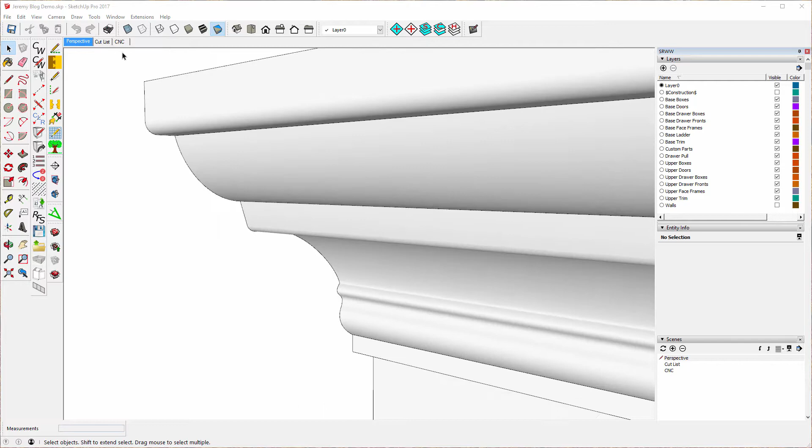Notice this trim, nice and smooth. And I got this off the internet and traced it using Bezier curve tools and the follow me tool to create it. It's actually in 3 parts. This is 1 part, 2 parts, and this is actually the same part as this but flipped. We'll get to that later.

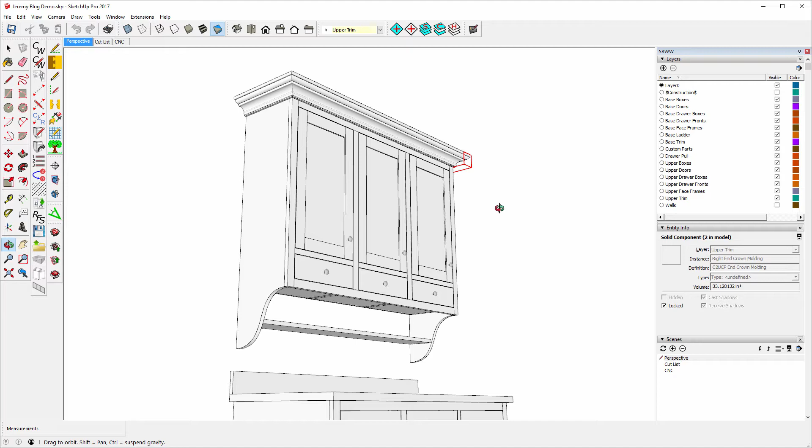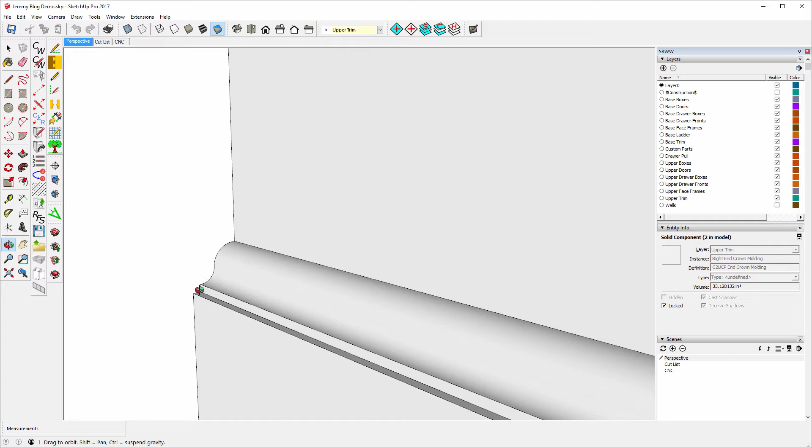This was simply a matter of drawing this cabinet using sheets here instead of end panels, and then extending them and creating this curve and cutting it out. I also added this little shelf. Nothing fancy about the countertop or the backsplash. This profile was created by simply creating a 3/8 inch round here, 1/4 inch round here, and then a 1/8 inch by 1/8 inch rabbet here.

So let me view basically the CabWriter components. I'm going to take the doors, I'm going to take the upper doors and upper drawer fronts off. And you're left with the drawer boxes. You'll see later on we had to compensate for this small drawer front. I believe it's 4.5 inches.

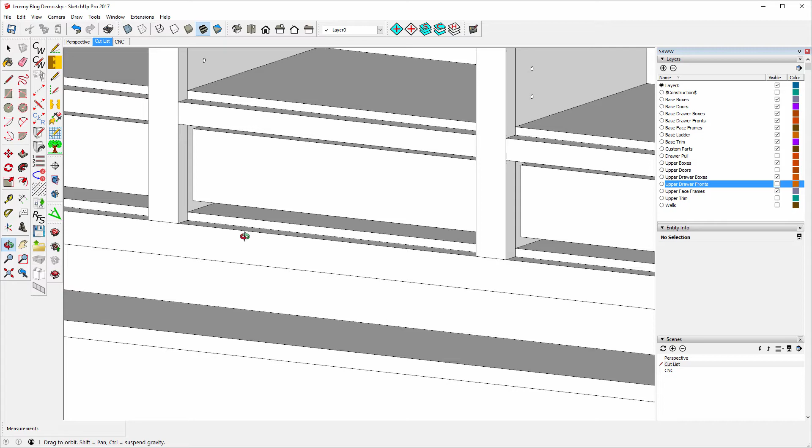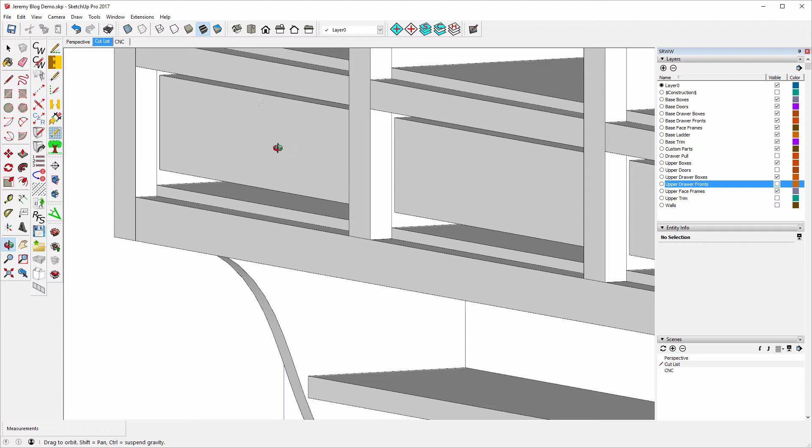Yes. And notice also that because the bottom of the cabinet is inset, I'll show you that. The bottom of the cabinet is actually inset. Come around back here. The bottom of the cabinet's inset 1 1/8 inch. And what that does is it causes the bottom to be raised above the bottom rail by 3/8 of an inch. That cuts down on the opening here. So we have to take that into account, and we have to choose a drawer box that's going to leave us 9/16 of an inch gap on the bottom here, or clearance, and 1/4 of an inch clearance on the top. So we'll get to that later on, how we did that.

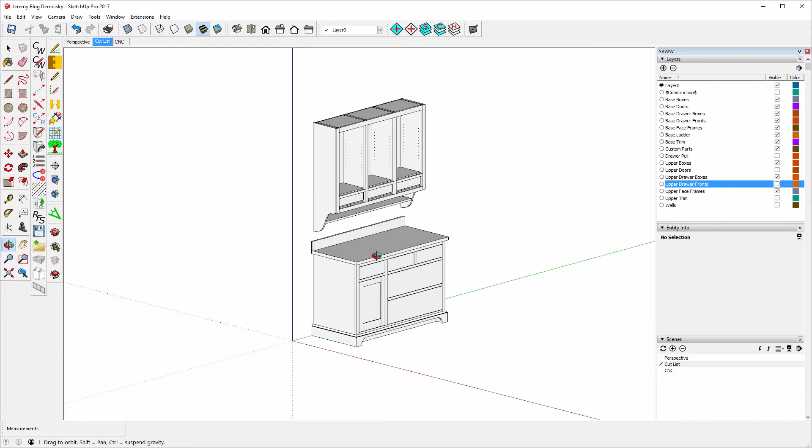Otherwise, besides this end, which I'll get to later, this is a standard divided upper cabinet. Notice in the base that I combined slab drawer fronts with a standard frame and panel door front. And again, that just helps give it a little bit of a furniture look. I'm going to look just at the cut list here and take the trim away.

And notice one of the changes I made, well, I made several changes. One change was I took this side and I extended it using the push-pull tool, extended it to come down to the bottom of the ladder base. Not all the way to the floor, in fact it's about 1/2 inch off the floor, but it comes down to the bottom of the ladder base. Further, I took the ladder base, I took the end trim pieces or applied trim and removed them.

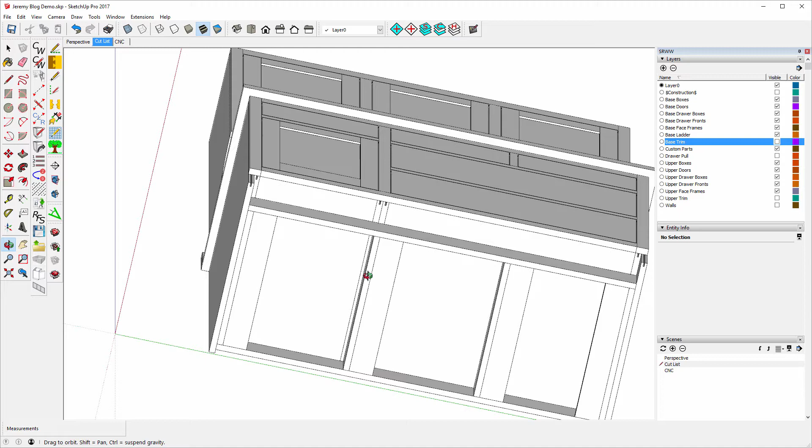I kept the front trim, and I moved these ribs and stretchers to the end to slide up against the sheets on the ends here that I extended. I did the same thing here. I slid these to the right so that they would end up against the sheet that I extended. I also added one more set of ribs than CabWriter drew, simply by copying one set and moving them over. But that's about all I did to change the base cabinet.

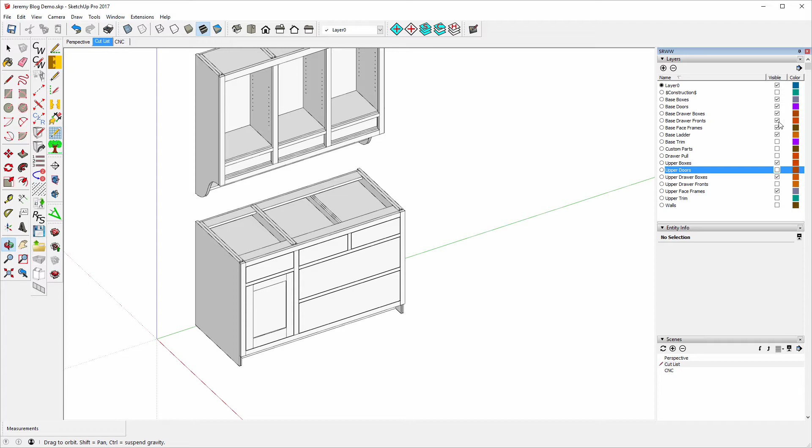And let me get rid of the countertop. It's called custom parts here. And I'll get rid of the drawer fronts and the doors on the base. And the doors. And again, if we look at this face on, I think that's this view here.

You notice that I allowed 9/16 of an inch clearance on the bottom of all drawers, 1/4 of an inch on the top, although there may end up more than 1/4 of an inch because we couldn't select a drawer front or a drawer box that used all of the area. But also notice that I changed the drawer bank here, the 3-drawer bank combo, so that these two drawers were the same size. And again, that just gave us more of a furniture look. Let me get rid of all this. Bring in the ladder base.

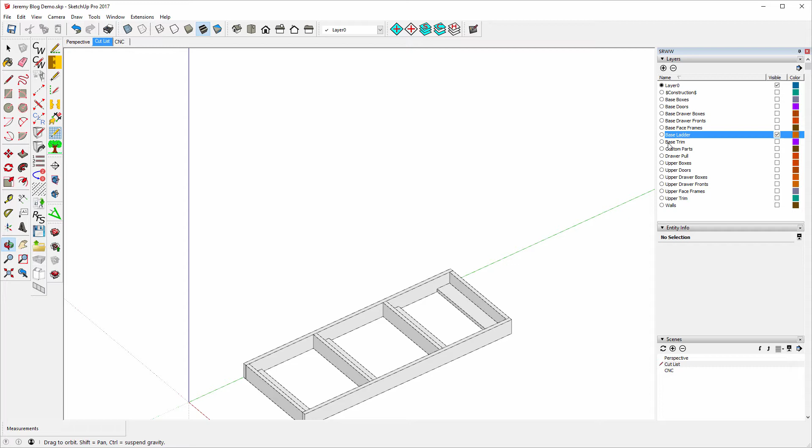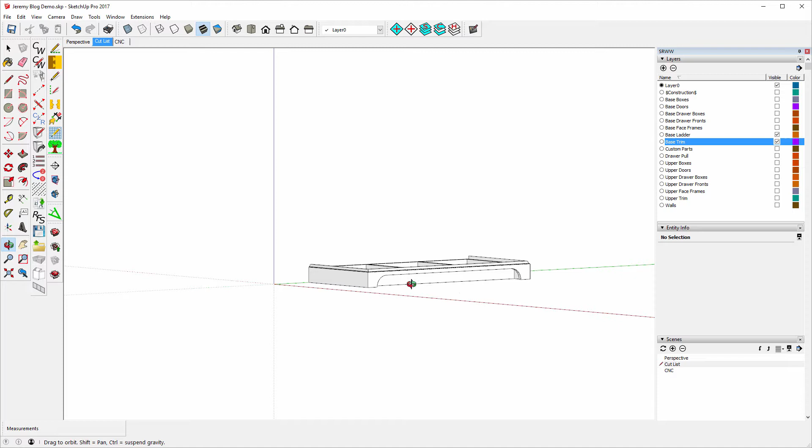As I mentioned, that's pretty standard. But if you look at the draw, if I include the base trim here, notice that I kept the base trim, the applied front here, even though I deleted it on the ends. I kept it in the front, so as you look in under here, you will see a nice finished hardwood. I also had to add 2 little pieces of hardwood, one here and one here, just to finish it off. Other than that, things are pretty much standard.

So with that, let's get to actually building this. Offline, I built this wall and marked up these construction points just to save a little video time. So let's get started. I'm going to start with the base cabinet.

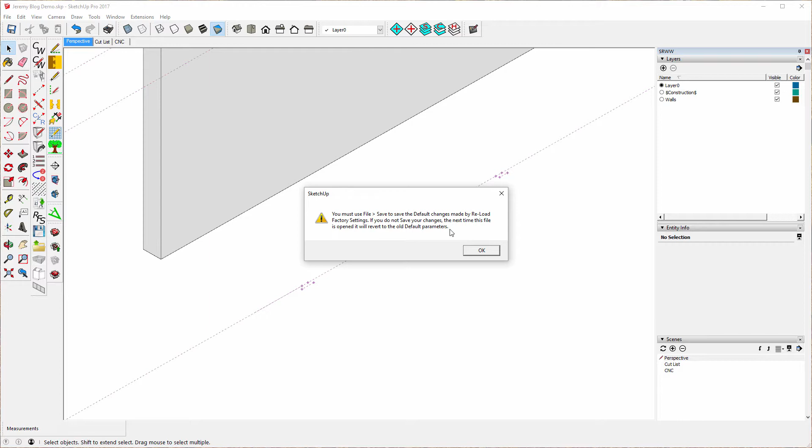And I'll start with my story. Oh, what I should mention is I'm going to start off using the reload factory settings. And it reminds me that to make sure I did that, I should save my file, which I will do. That's a baseline set of settings. Now, there's a few things I know I want to do.

Recall that in the base, we have a bottom rail, so I've got to make sure I change that. The draw fronts are slabs, and these 2 draws are equal size, so I need to change that. So let's do that.

I'll go to my CabWriter settings, and let's first go to the face frame. I'm going to change these 2 draws in the 3-draw bank to 9 15/16. I'll change this one too.

And if I recalculate or update, the reason it's saying there's something wrong is I haven't yet added the bottom rail. That 9 15/16 was based on a bottom rail. So let's put the bottom rail in.

And now the 3-draw bank is updated and it's correct, but the other 2 are not. And I'm not going to worry about those at the moment because I'm not going to use a 2-draw bank or a 4-draw bank.

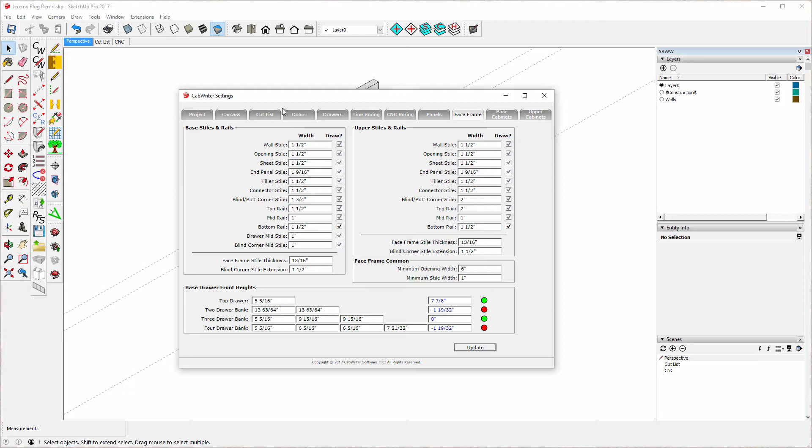But the thing I need to worry about is I've got my base rail. I need to change the draw fronts to slab draw fronts on the base. So let's update that. Now we can close this and we're ready to draw.

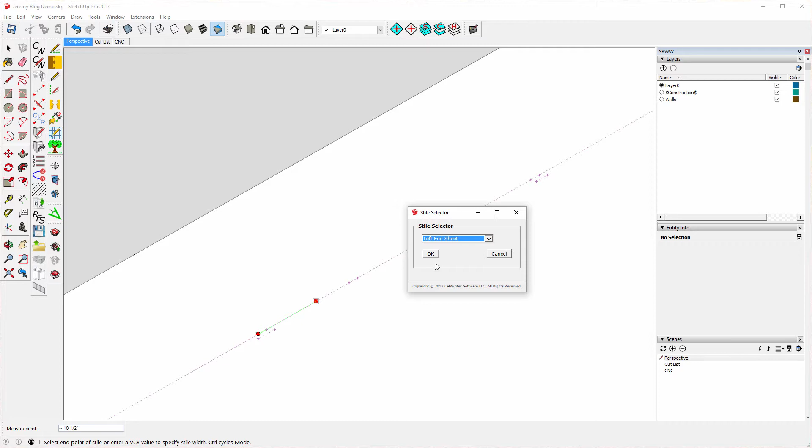So let's go to the story stick. I'm going to start off here. And I'm going to use a left end sheet because this is going to end up being hardwood. And if I draw it as a sheet, it'll be easier to change it to hardwood.

And I'll go here and use a right end sheet. And then this is just a connector. By the way, I designed this so that this is 15 inches from this guide point to this guide point, and overall it's 51 inches. So I think this is something like 30 inches, or maybe 31 and a half. 31 and a half. Okay, so let's keep going.

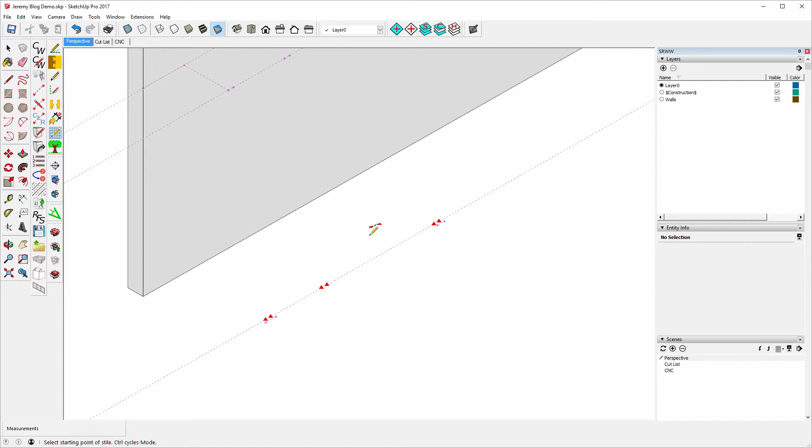Let's hit end here to start choosing what it is we want. Okay, the first cab is going to be a standard base with draw: one door and one draw. The next one is going to be a draw bank combo with 3 draws. And there we go. We've got our base cabinet.

It was that simple. All right, now I want to make some changes to it. First thing I want to do is I got to fix up the toe kick. And let's see if I can do this. No, the first thing I want to do is I want to extend the sides.

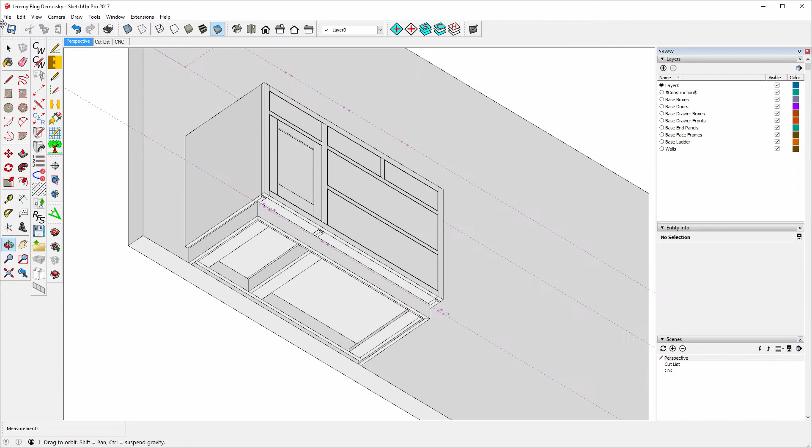And so I'll choose this side. I'll unlock it. Edit component, use the push-pull tool. I'm going to bring it down, down to the base of the toe kick.

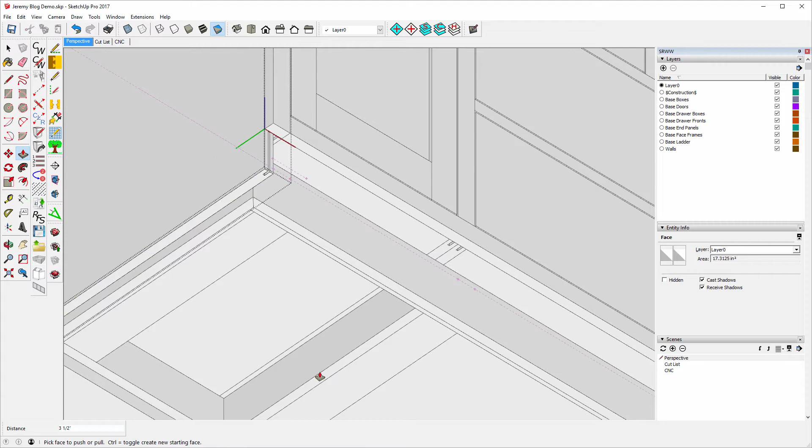Notice I'm touching a part of the toe kick here. I'm going to bring it down to the base of the toe kick. Notice, let me get out of edit component mode here. Notice that didn't bring it all the way down. It's about a half inch left, I believe. It should be anyway. Yes, it's a half inch.

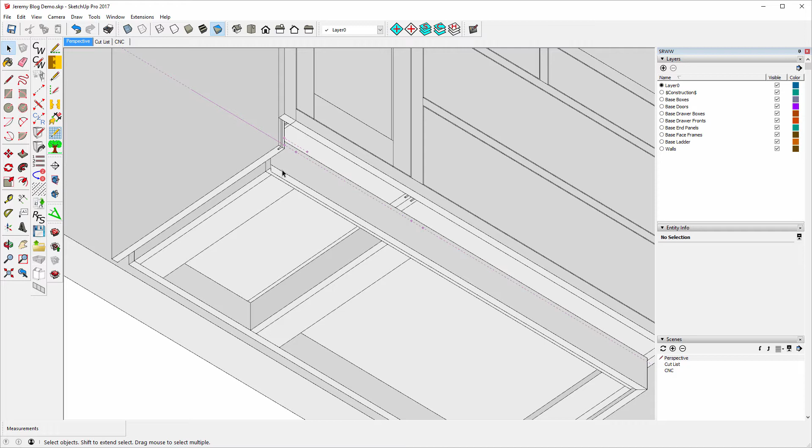And while I'm here, the other thing I want to do is get rid of this trim piece. I'm going to extend the ladder base, so I don't need that. So I'll unlock it, delete it, and I want to bring this front trim piece all the way to this side. So I'll unlock that, and I'm going to edit it as well.

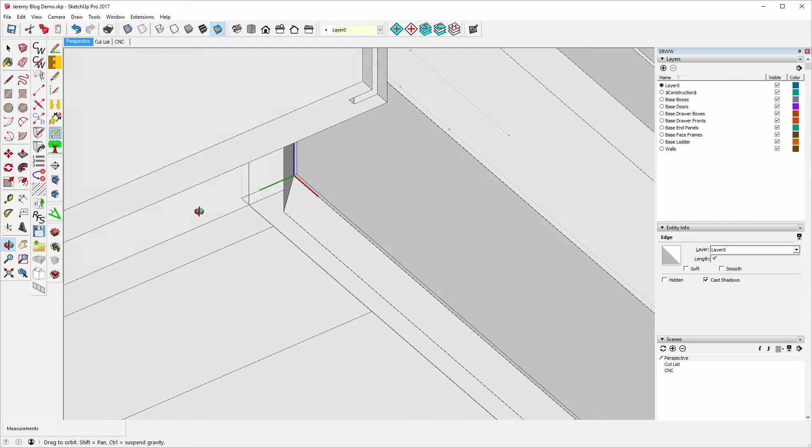I'm going to pick this line right here. I'm going to rotate here so you can see what I'm doing. I'm going to pick this line, just the line. And with the aid of the move tool and locking my axis, I'm going to move that along the red axis. So I'll lock the red axis with the right arrow key, and I will touch this. That means I'm moving that line over to touch the side.

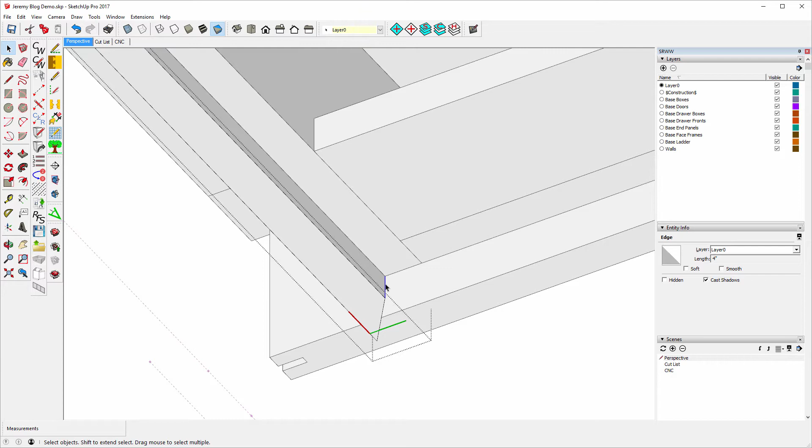And now I've got to move the other line as well. So I'll just come in here like this. Select that line, and with the move tool and the help of the red axis key, this time I'll touch this point. Now notice I have a butt joint and it's butting up against the side. So my work here I think is done for now. I'm going to come back and get the toe kick in a moment. I'll go down to the other end and do the same thing that I did here.

I'll first get rid of this, and select this end, unlock it, edit component. I'll use the push-pull tool to bring it down to the bottom of the ladder base.

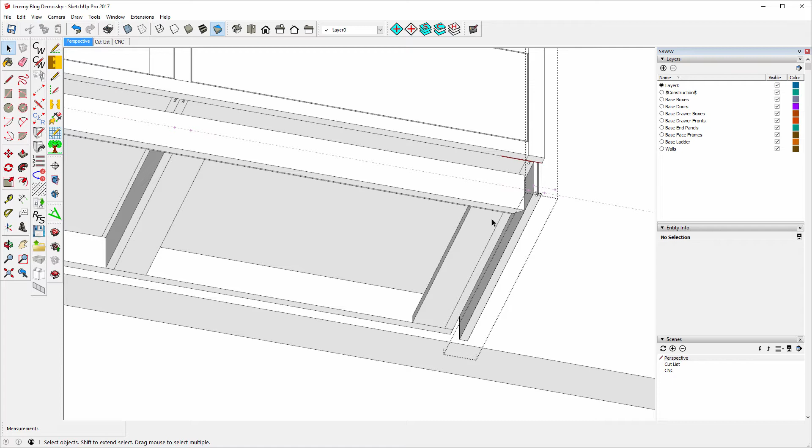I'm using keys on the keyboard now just to speed things up a little bit. I'm going to edit this now, do the same thing here, make a butt joint out of that. So I'll choose this line.

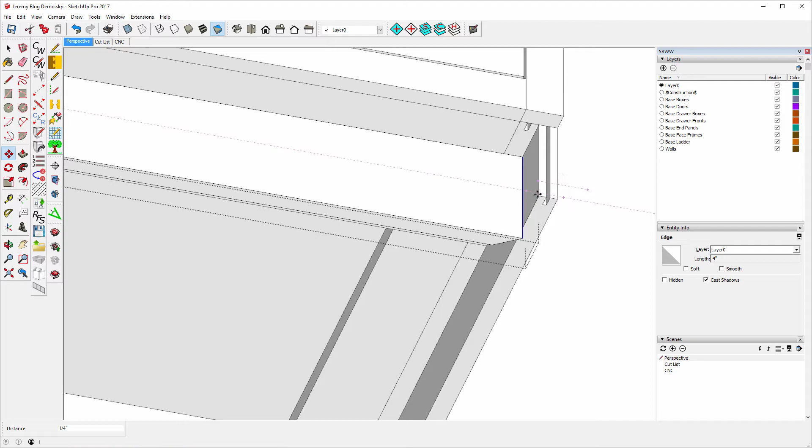I'll use the move tool along with the red axis lock, and bring it to that point. I'm going to come around here and do the same with this one. Use the move tool along with the red axis lock and bring it to the same point as that. Now I've got a butt joint.

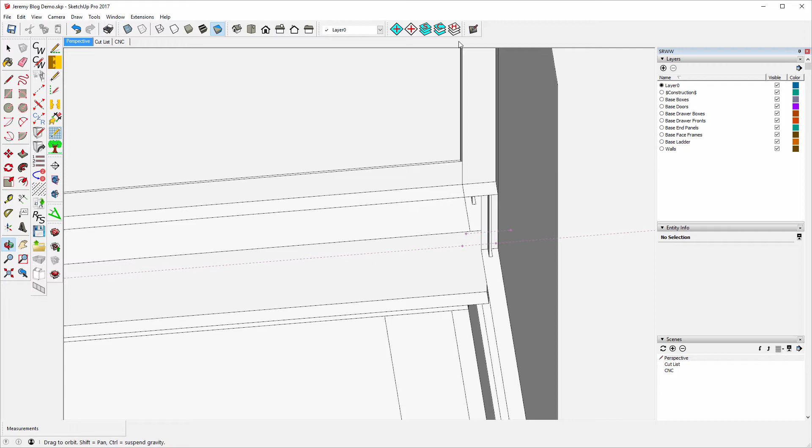Right there. And now what I'll do is get rid of the... let's just bring in here the base ladder. That's good, now I can see what I'm doing.

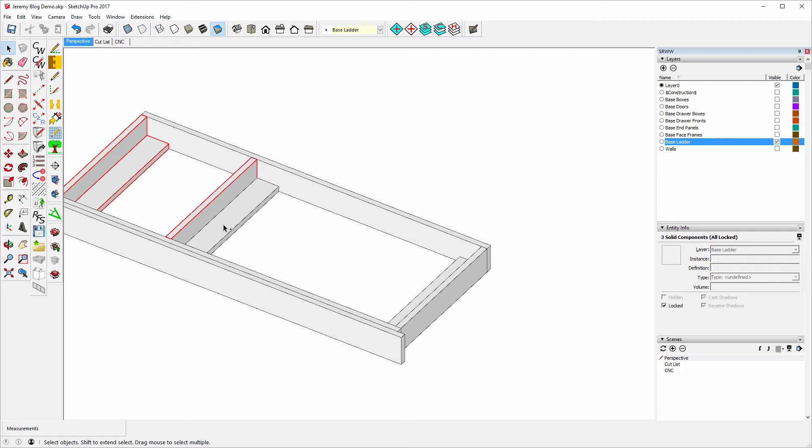I'm going to move that, I'm going to copy that and move these. So I'm going to unlock them. First thing I'll do is I will extend this one. Edit component.

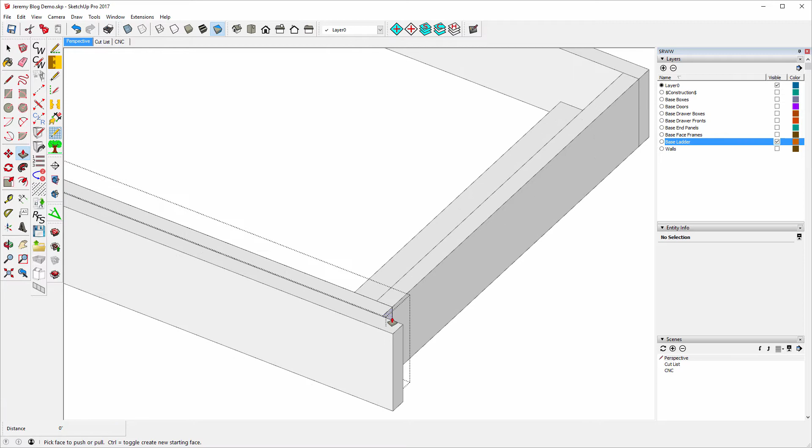Move this end to come out to that dimension. I'll do the same over here. Well, I've got that in edit component mode. Bring this out to here.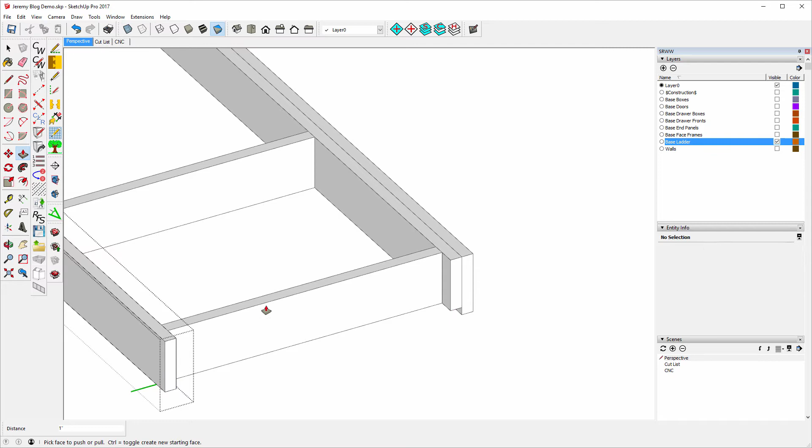Now I'm going to move... oh no, I might as well do the same thing with the back tie. Bring that out to there. And I'll go around to the other end and do that. And now it's just a move and copy operation.

Now, this may require a little arithmetic, but what I'm going to do is measure this, 33 3/8. Let me just go offline and divide that by 2. Okay, 16 11/16 is what I calculated. So I'm going to copy and move this 16 and 11/16 along the green. And there we go.

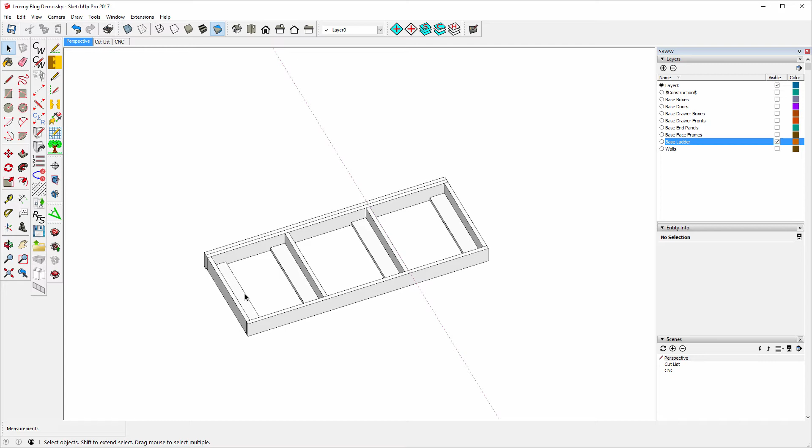So now the ladder base is done, and I can bring in everything else. And I'm about ready to put my trim on. Might as well do that right now.

And I'll start by putting a construction line here, 0 distance, just to mark that edge. And another one to mark this edge. And so I'm going to create...

Well, the other thing is I've got to come up here 3/4 of an inch, half the way up. And just to mark that on the other side, I'll bring this up to here, so now I'll know where I am over here.

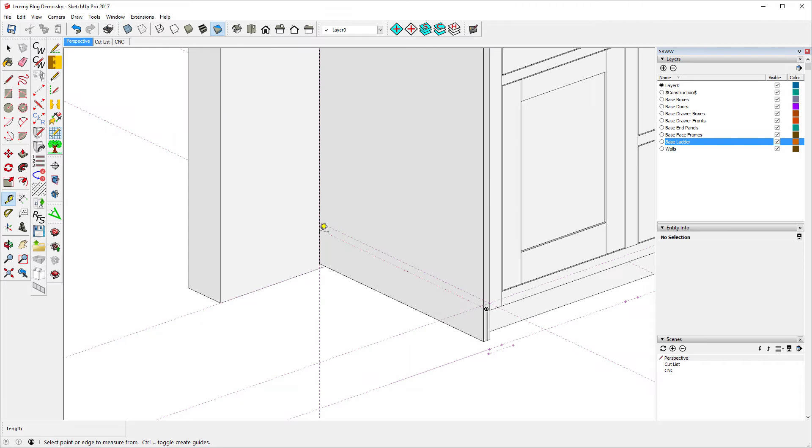I'm going to create a 3/4 inch wide piece of trim there. Notice if I look down in the VCB, that the 4 3/4 is the correct dimension. The other one is an approximate dimension and it's not correct. So I need to change that to 3/4 of an inch because that's the thickness of this trim.

All I need to type is comma 3/4, because it's the thing after the comma that I'm going to change. So I'll simply type comma 0.75, enter, and there you go. I got my trim.

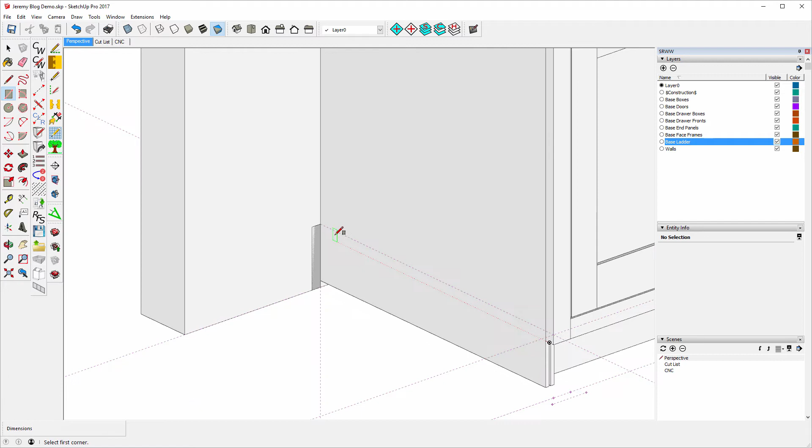And now I want to create the 3/8 inch radius here first. So using this tool... well, I can use this tool. I'll come out 3/8. That's interesting, that's the center of that.

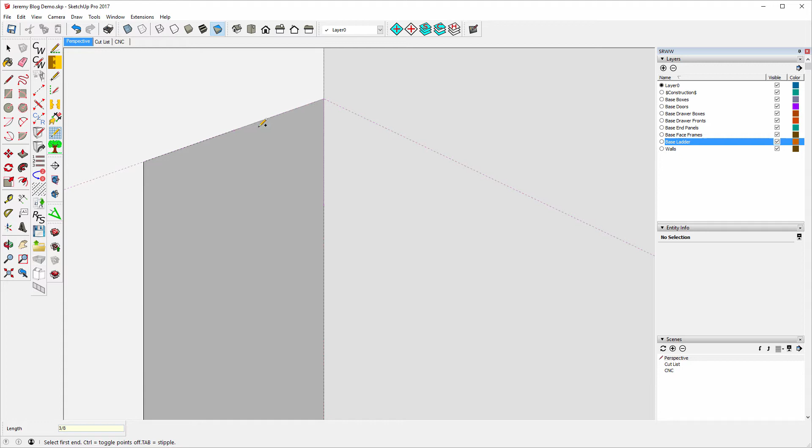Let me come down 3/8. And from there, why didn't it give me a construction point? Well, I'm going to use this tool, down 3/8. I got a construction point that time, but not for long.

No, I'm not seeing my... there we go, now I can see it. I can barely see it. Okay, so I'm going to use this tool here. I need my 3/8 over here.

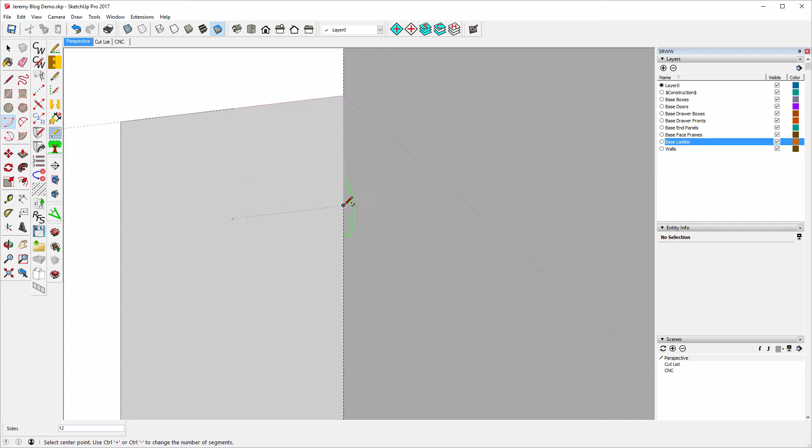Now I can use this, and that. That gives me that 3/8 inch radius.

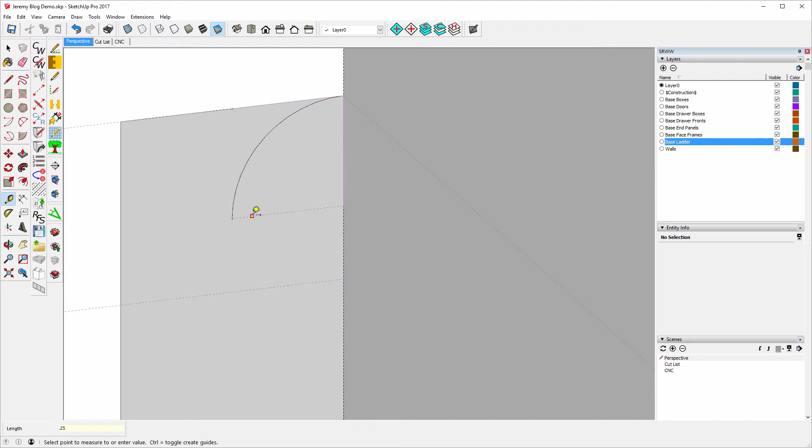Now I want a 1/4 of an inch radius. I'm going to use this, come down 1/4. And I'll use this one, make a 0 there. Start out here, go from here.

Whoops, that should be... whoops, made a mistake. Got to come in an eighth here, got to leave room for the rabbet. There we go, now I can use that one. That's a 1/4 of an inch radius.

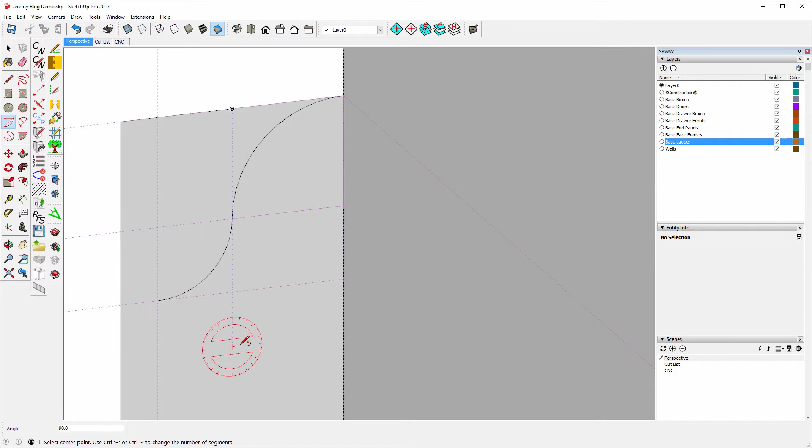And finally, I'm going to use my pencil tool, come down an eighth, and out an eighth. And now I'll get rid of that top line and this line. I've got my outline for my trim.

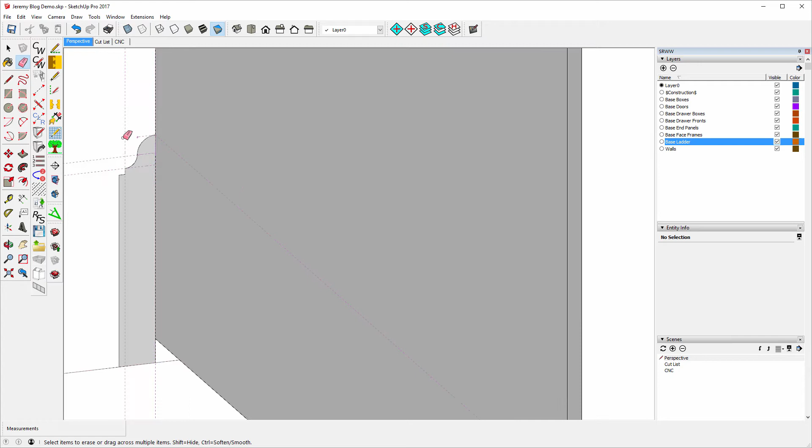So let me do this. Now let me use the Follow Me tool, but before I do that, I need a path for the Follow Me tool. So I'm going to start right there, I'm going to go from there to here.

To that point, I'm going to go around the side, continue with my line tool to here and end it. And I'll select that line.

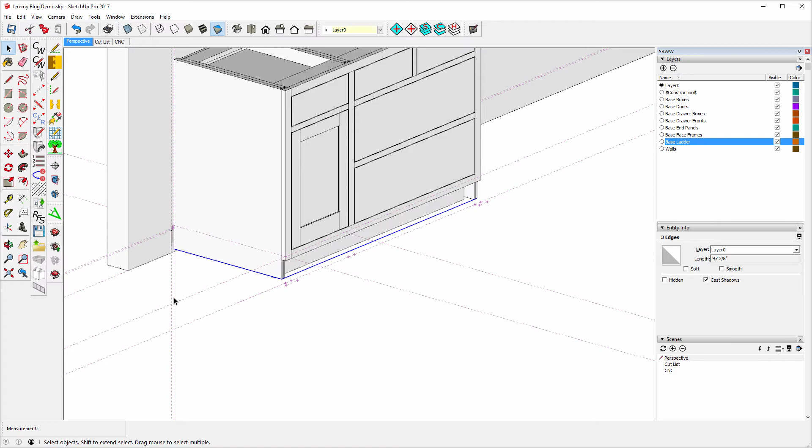I'll select the part on the other side. Notice what I'm doing - I'm just selecting that path. And now it's a simple matter of zooming in here, choosing the Follow Me tool.

And there we go, we have our trim. Oh my goodness, let me back that up. The trim is in the wrong place - my path was in the wrong place.

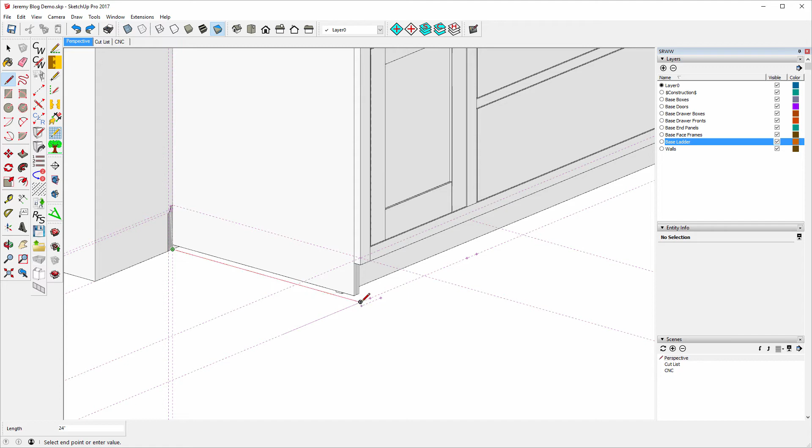So let me get rid of my path. Let's do that again. The path wants to go from here, to here, to here, and back here, 24 inches.

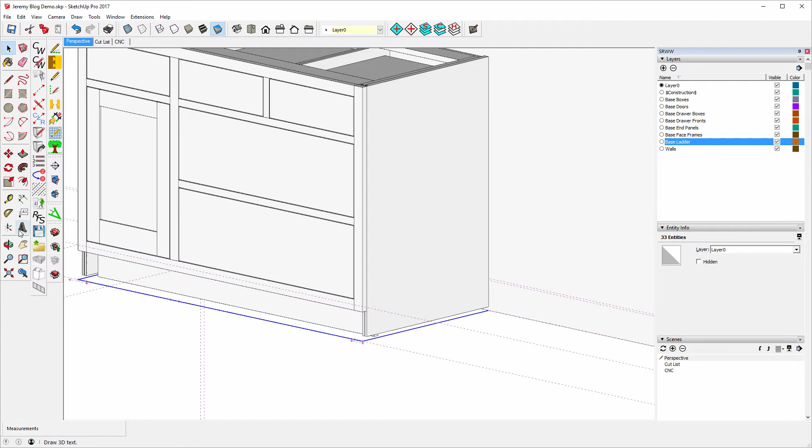And now we'll choose this line. I can't choose it that way, or else I'm choosing that cross section too. Let me just choose that, control, and this one. Now I've got that path. Now we're good to go.

So I'll choose the Follow Me tool. And that's more better. All right, now.

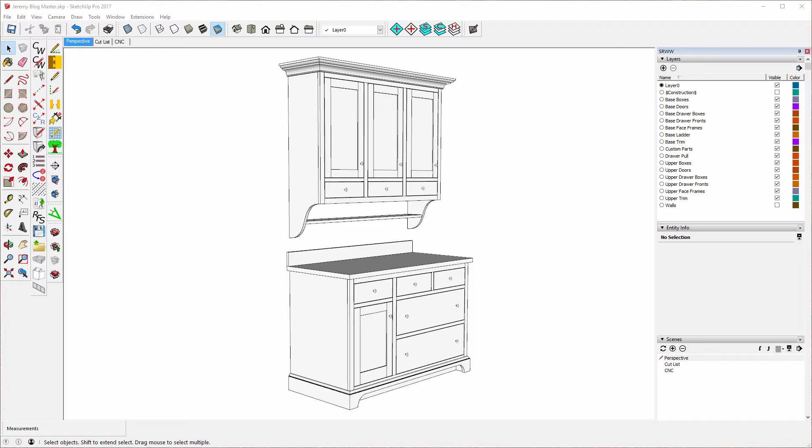What I'm going to do is bring this up, I believe, 3 inches. Bring that in. Why is that 2 inches? It should be 3. Was this one 3? Yep.

And I need another 3. You'll see why in a moment. All right, now I've got to use my arc tool, and I'm going to start out here this time. That's why I needed the other 3. Click there, click here, click there. There, there, there. Now I need a line.

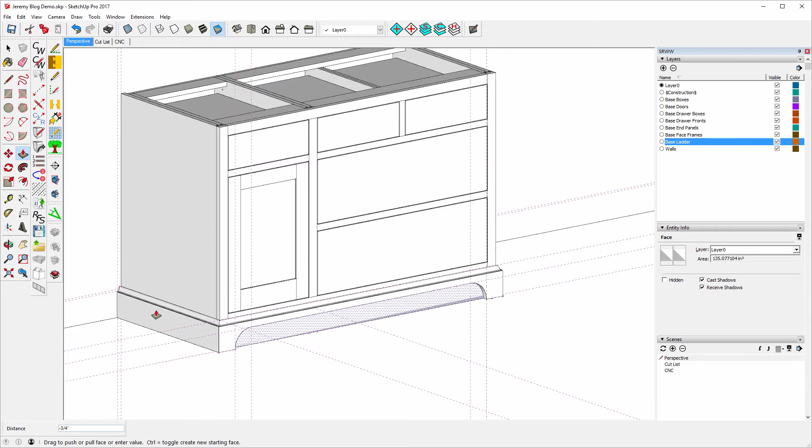Now with the push-pull tool, I'll just push this back. And I have my trim. Now that's a one-piece trim right at the moment, and it's still not even a component.

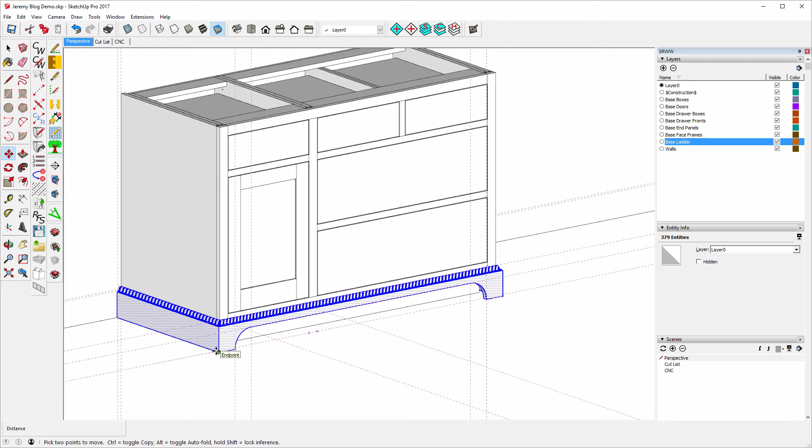So the first thing I want to do, I'm going to triple click on this, and I'm going to make 2 copies of it. One copy I'm just going to bring it out here, and then I'm going to make another copy, bring it out here.

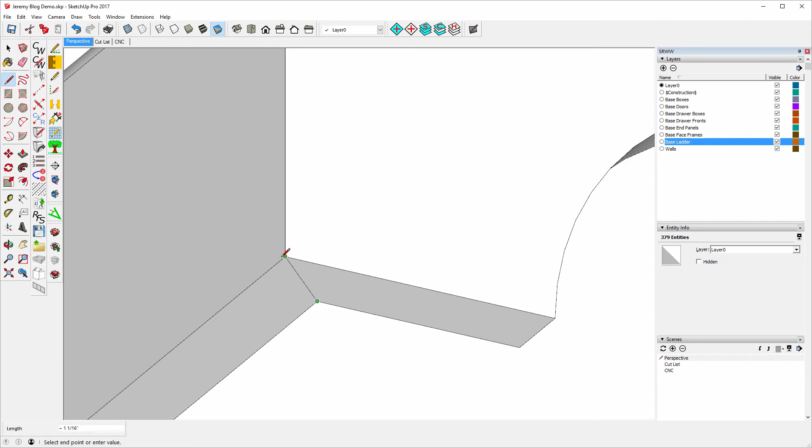And I'm going to zoom in real close. I'm going to look for missing lines. Here's one right here. If this were a miter cut, there would be a line right there. Let's look around the bottom. Again, if this were a miter cut, there would be a line right here. Let's go around - all right, we got that line.

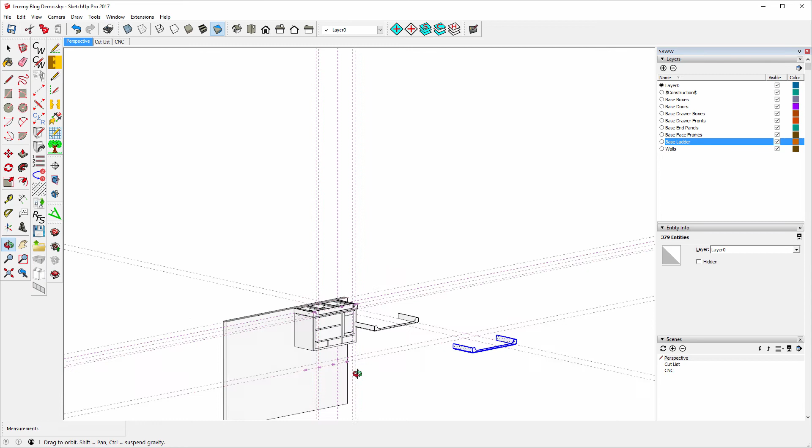All right, so now what I can do, I'll go take a somewhat of a top view here, and I'm going to use the select tool in the left to right fashion. And I should get rid of my construction lines here, and I'll delete these. And I got some more to delete.

Left to right, but not touching. Oh, I see a problem - guess I didn't get that line. I'm going to back up.

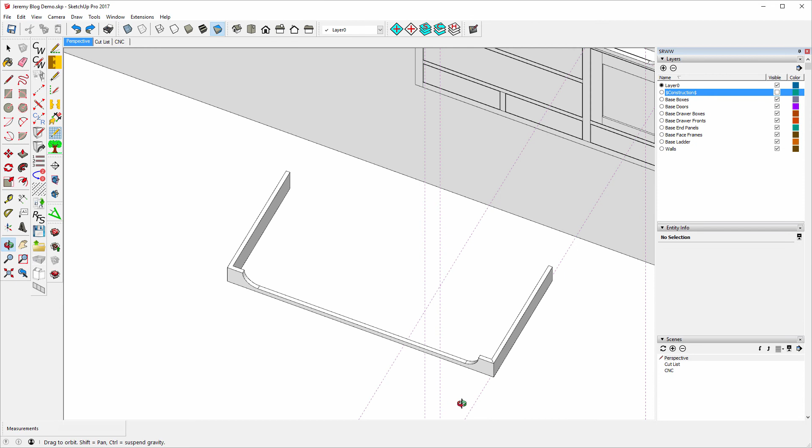I'm afraid I've done so much flipping around here, I forget which one I was working on. Okay, it's this end I'm working on. I think I erased the wrong end. I did - when I went to the top view here, so we'll do this again. I'll do it this way.

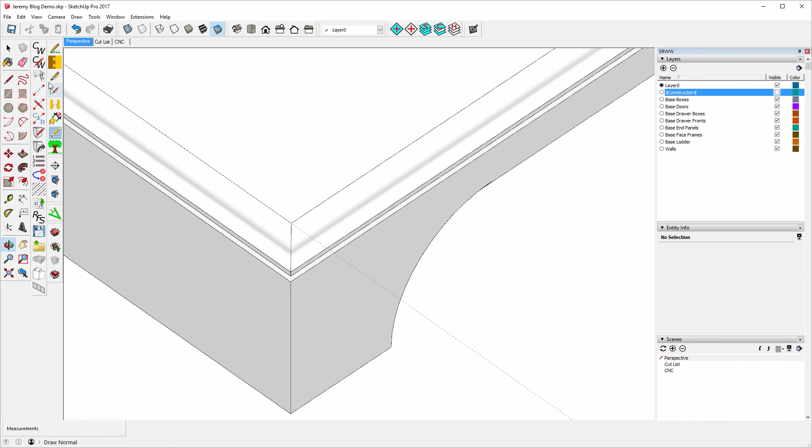That's better. Now what I've done is I've deleted all the pieces except what makes up a side piece. And I'm going to do the same thing out here, but this time it's going to be the front. But first, again, I have to once more add the lines, so we'll do this a little more consistently this time.

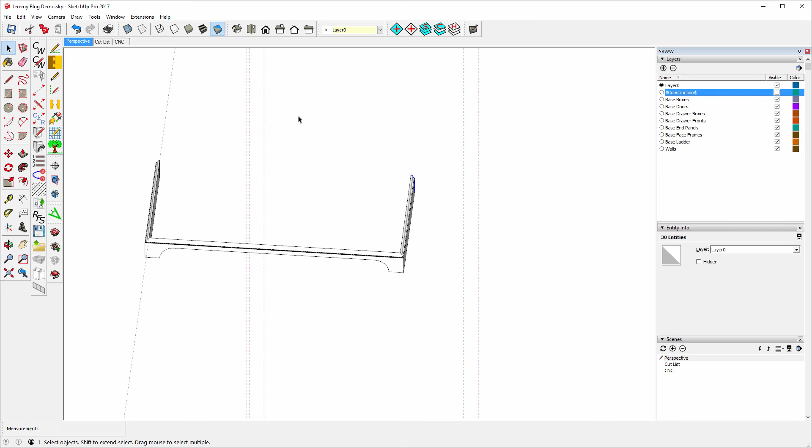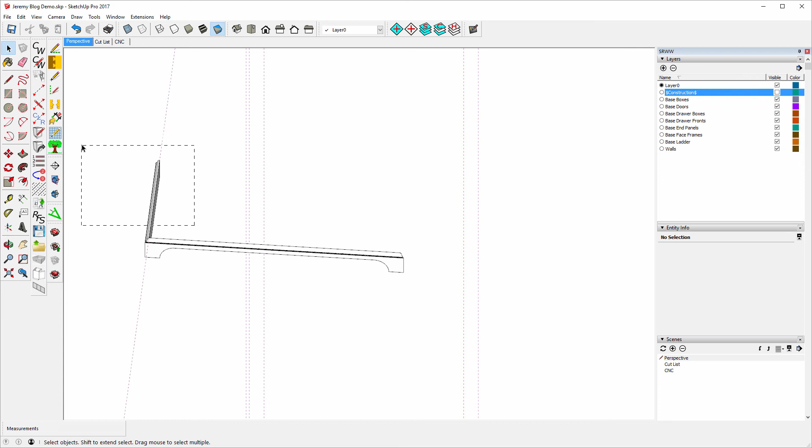And now some of this will get selected. In fact, some stuff I really don't want will get selected because it was partially in the bounding box. So the left to right allows me to do that and get rid of just those side pieces. Same thing here. And what I'm left with is front trim.

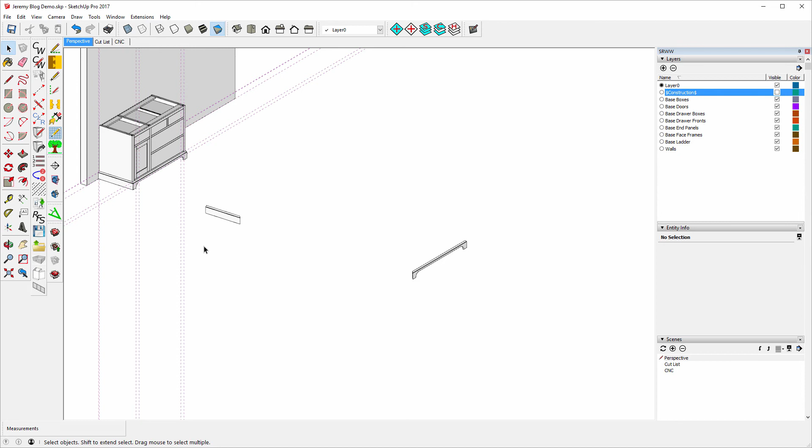All right, now I'm going to make them components. I'll just make that a component. I'm not going to worry about the name right at the moment. And I'll make this a component.

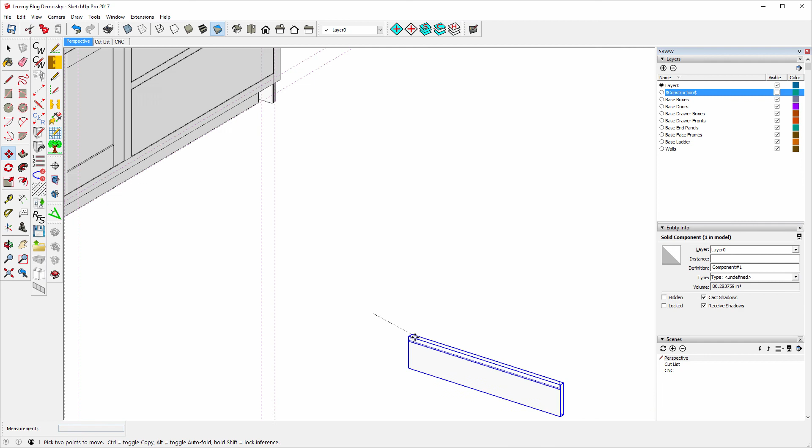And now I can select all of this and get rid of it, and I will replace it with this. I think that goes there, but I'm not positive. Let's do this.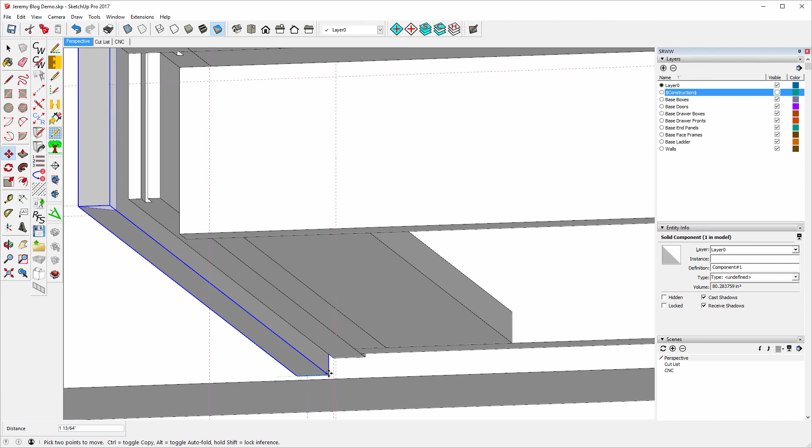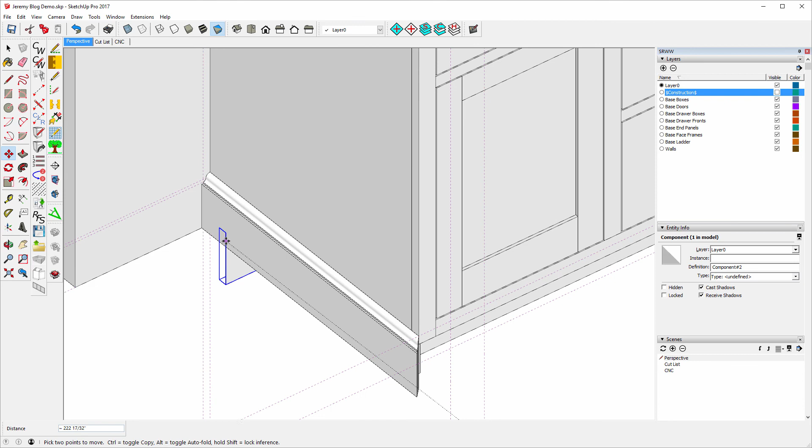There we go, that seems right. I'm going to pick this one up with the move tool. I'll just move it close—I don't have to get it exact right at the moment. And then I'll get it exact by picking up that point right there and connecting it to that point right there.

All right, now this is cabinet number 3. If I select this and look in this box right here, notice it says component 2. Now, the reason it's component 2 is I have 1 of them, actually not in the picture, but in the components library, which I will delete later.

But right now it's component 2. So what I want to do is rename these parts and assign them to cabinet 3. I'm going to do that not by changing the name here—don't ever take a CabWriter component and change its name here. We always want to change a CabWriter component's name using this tool right here, rename component.

And what I want to do is, first thing, type in here the cabinet number: C3L. The C and L have to be capital letters, and the 3 is the cabinet number.

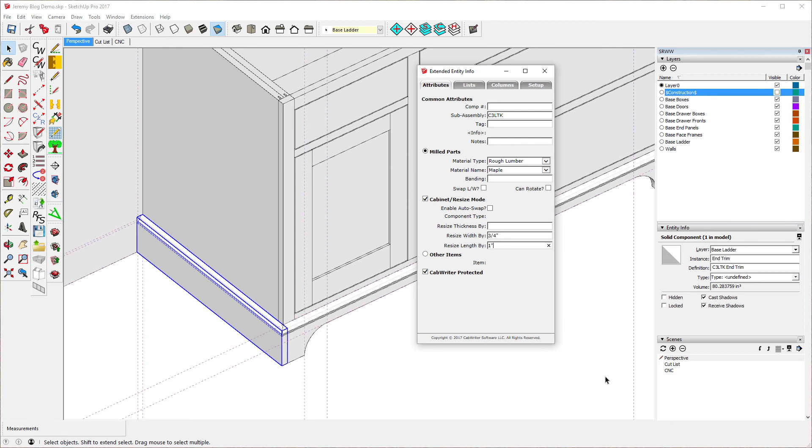Okay, now while we're at it, I'll just set this off the screen here for the moment. I want to rename this—oops, I'm just going to select it and use the rename tool, and again I'm going to connect it to C3L.

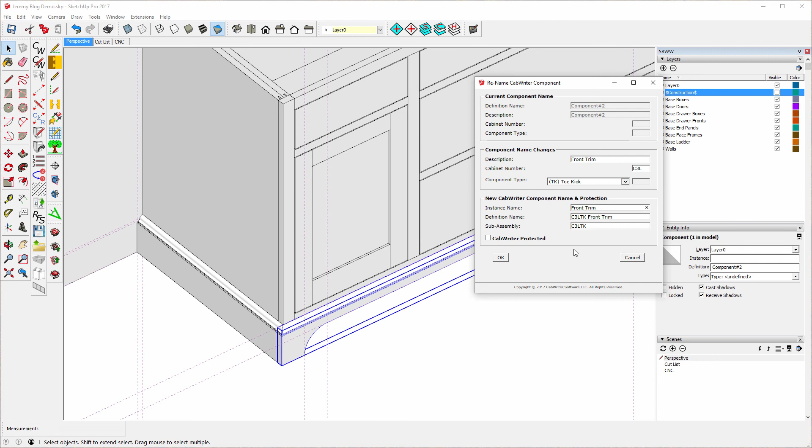It's going to be a toe kick part. I'm going to give it the name front trim, and I'm also going to call it front trim here. I'm going to protect it, say OK. All right, one last thing.

I have to put the piece on the other end. So I'll choose this piece, I'll copy it, and flip it. I'm going to flip it along the green because that's how I copied it, and now I'll attach it to the other part.

Now while I've got that part selected, I'm going to change its instance name. I can change the instance name either here or here, but I'm going to do it here. I'm going to make this right end trim—in other words, I'm not changing the definition name, I'm only changing the instance name, right end trim.

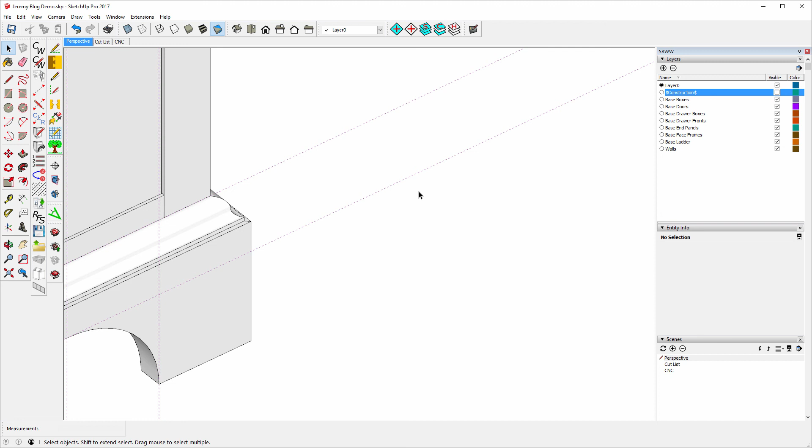So I'll go to the other end, I'll select it, and I'll call this left end trim.

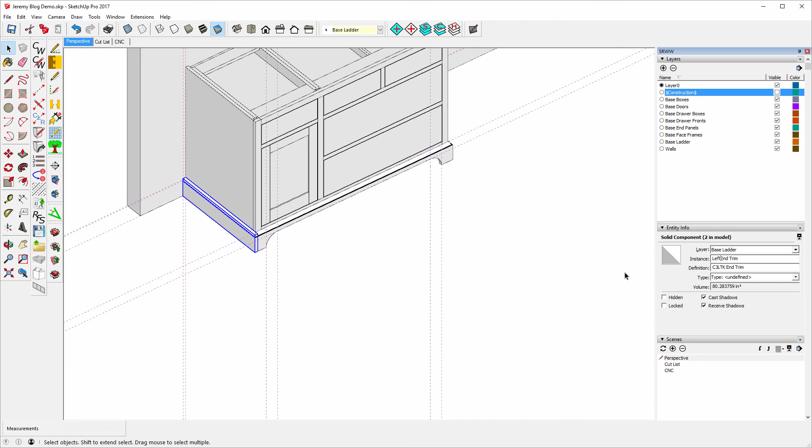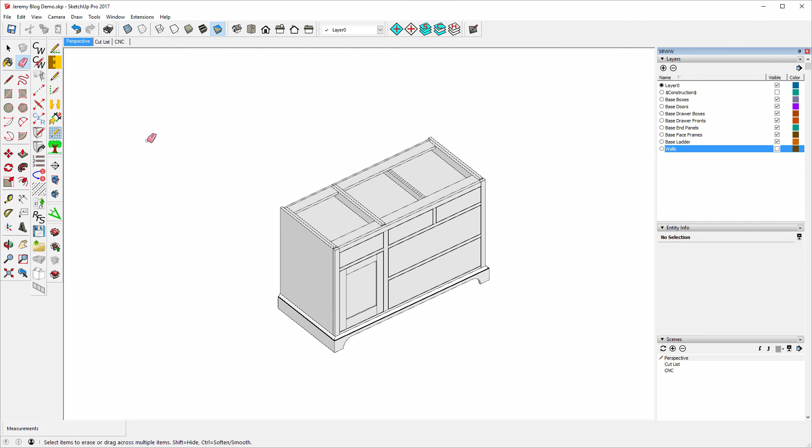All right, one last thing I want to do here, so I can get rid of some of these construction lines—don't need to have them around. One last thing I want to do is put a top on. Let me get rid of the wall for the moment. I'm going to use the rectangle tool and create a face from there to there.

I'm going to select that face and their edges, and use the offset tool, bring that out 1 inch, and I'll delete the inner face and edges now. Another thing I want to do is bring that edge back in—I don't want that protruding into the wall, so I'll bring it back in 1 inch. Now I'll select the whole face, and with the push-pull tool, I'll bring that up 1.25 inches.

And I now have my countertop. Triple click, make it a component, and I'm going to assign it to the cabinet, C3L. I'm going to call it a custom part, call it a countertop, and I'll give it the instance name countertop as well. I only have one in the drawing right at the moment.

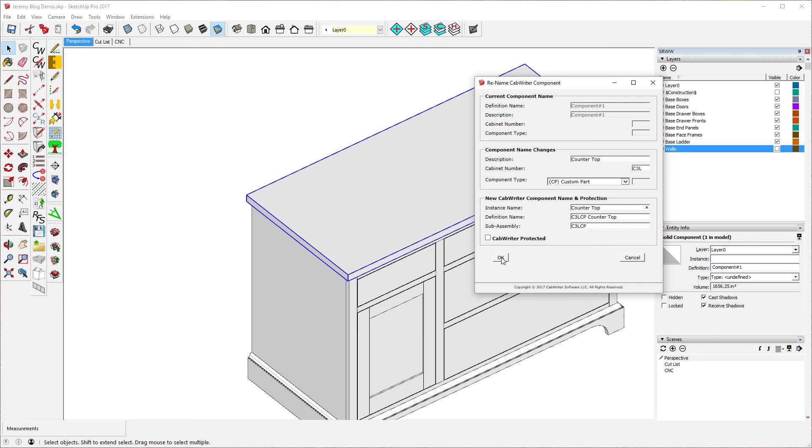And there you go, the top is done. That's it, and now later on we'll put the drawer pulls on. But that ends this base cabinet.